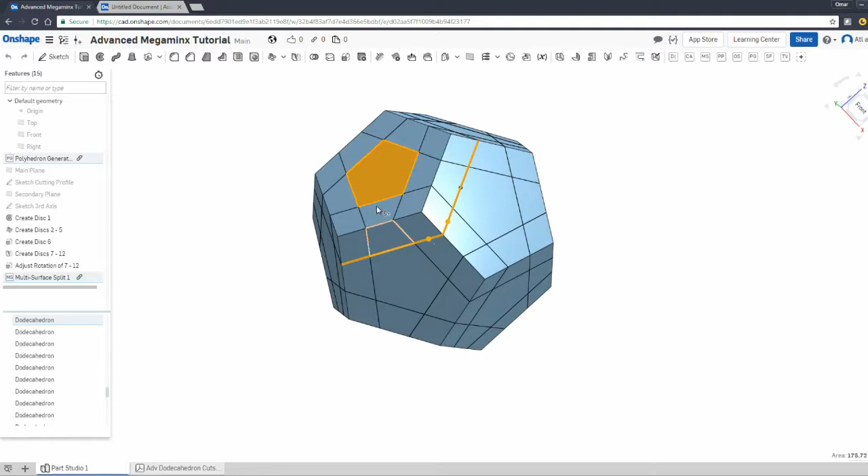I wanted to make this last video because there's another type of cut we did not talk about. I don't know what it's really called, but something like a corner cut, instead of cutting under the surface. When we create a cutting surface, the brim of the surface is parallel to the face, and that's not necessarily the case here. You would do that with a Starminx or other puzzles.

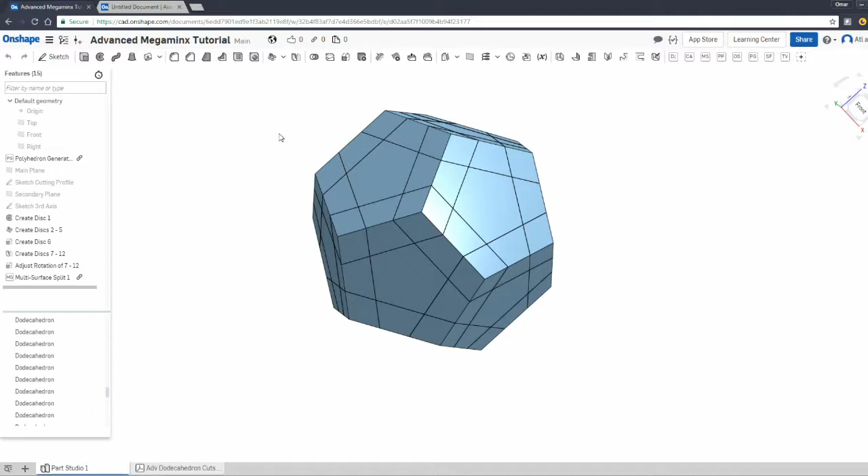I only know of a Starminx personally, and it produces a different type of puzzle. On the outside it looks just like a Starminx, but it turns differently. I guess it's called a corner turning Starminx or super Starminx, or maybe master Starminx or something like this.

In order to show you what I'm talking about, I modeled it here really quick in a basic assembly. Basically the corner rotates and it drags the edges along with it, instead of just a standard Starminx.

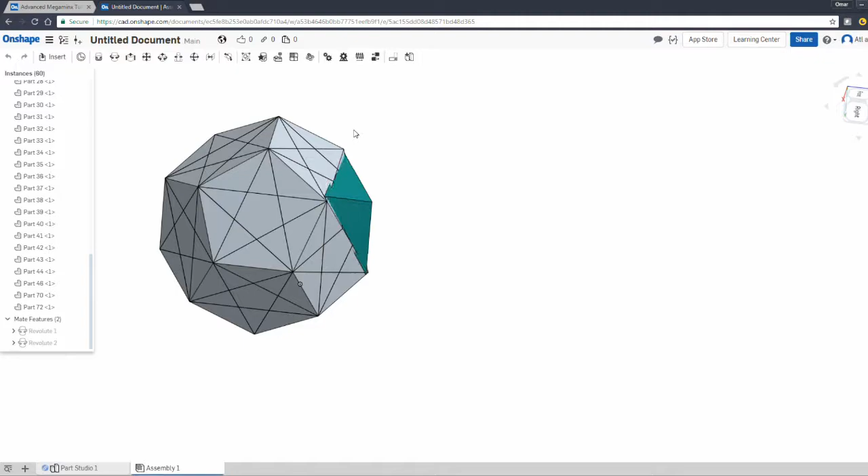If you look at your traditional Starminx, you'll find that these faces are what turns, along these lines here. This one has a slice that is like a shallow slice, barely just going under the vertex, and it gives you this rotating effect. I don't know what category it goes under, it's just a different type of cut that I've seen.

So let me show you. Basically, I did this by slicing off this face right here off of my dodecahedron, and I created this circular cavity that allows the corner to spin, and it drags the edges along with it.

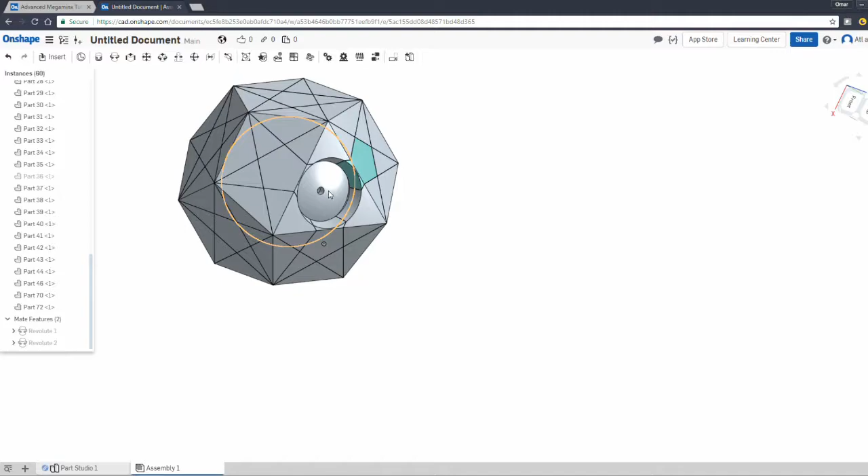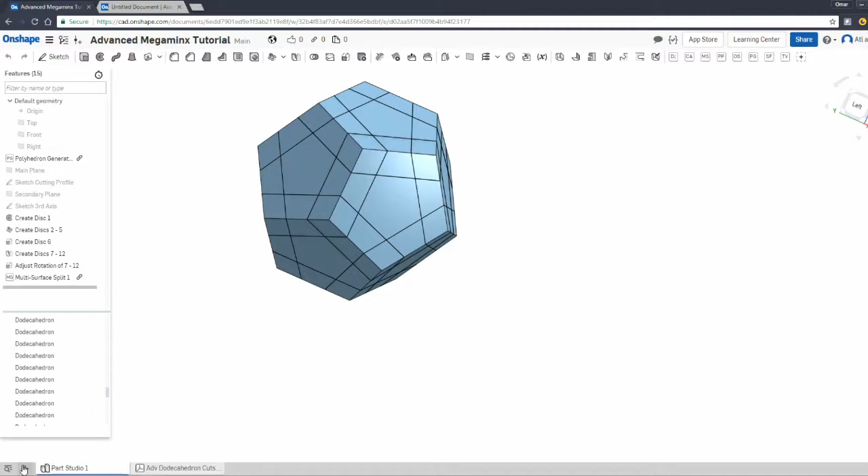Now personally, I've never 3D printed this part, I've never ordered it to be printed. I just reverse engineered some models and kind of figured out how it works, but I've never actually applied it in real life - my only experience is theoretical. But I just wanted to talk about it really quick to get you familiar with it. If you're curious how I made this cut, I'll show you really quick. I don't want to spend too much time on it, but I think it's worth talking about.

I'm going to use these tools that NKCube recommended in his series, the ones I referenced in part 1 of this series. Basically, I'm going to use a polyhedron generator in the origin and use a dodecahedron. I usually like these to be small, but the size is irrelevant in this case, so I'm going to do OK.

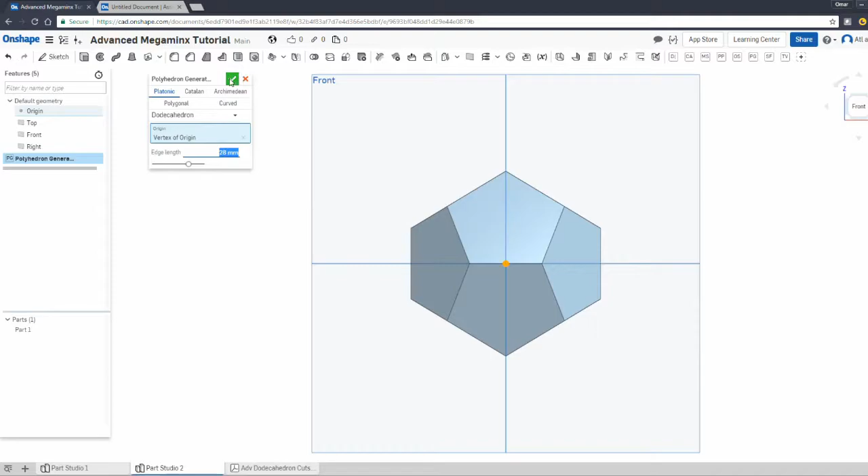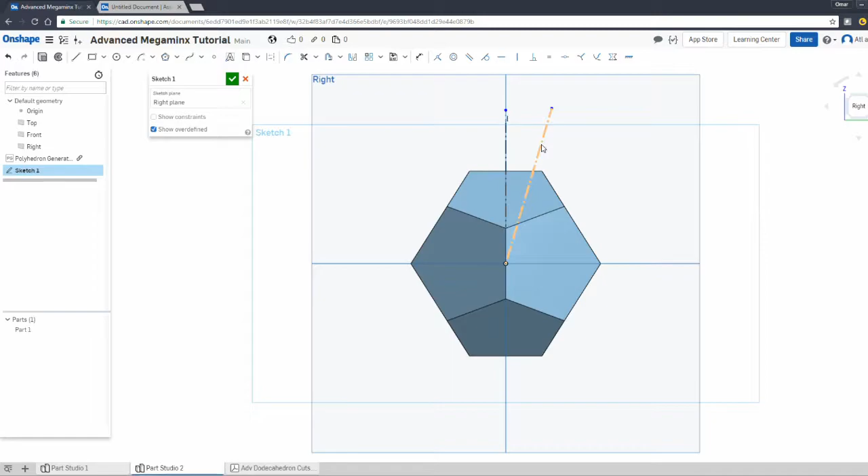Let's make a sketch on the right plane, and let's do a few construction lines here. I'm going to do one this way, and let's make one that's straight up vertical, and that's it I guess. And let's choose this vertex.

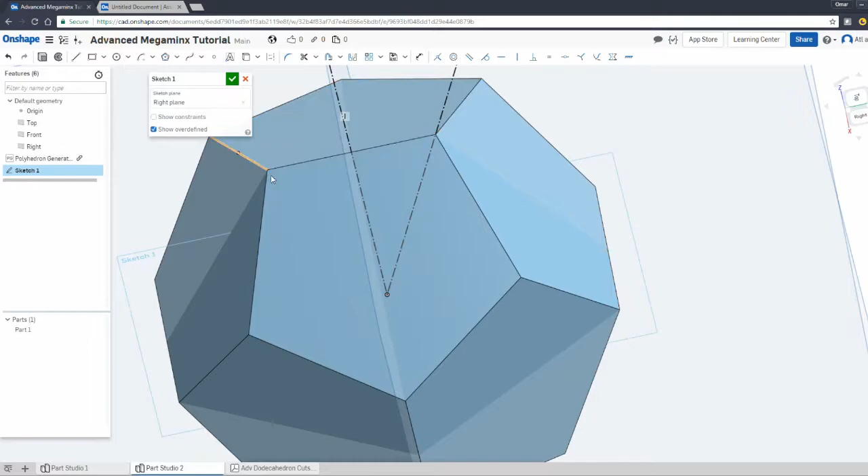So this is actually important. We're looking at this edge over here, the one that goes along this line. I want the construction line to go through this vertex here, so I'm going to make these two coincident, and I need a cutting line that goes into this vertex, into the opposite vertex basically. I hope this is clear. So we basically pay attention to this edge.

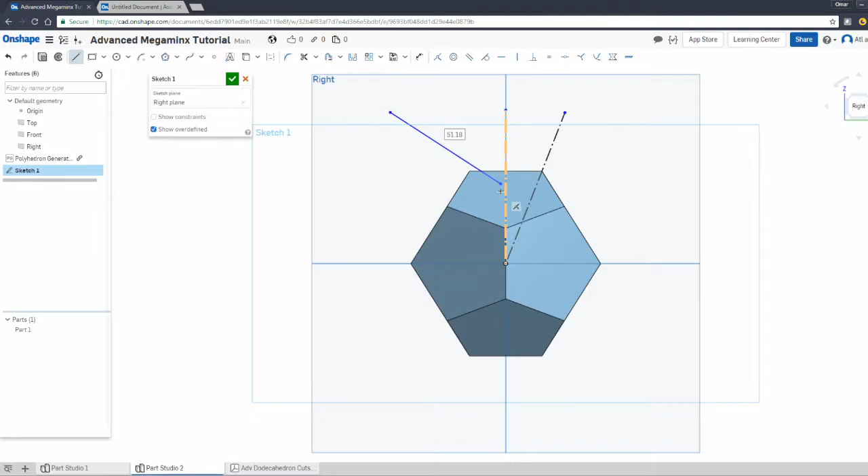I need my cutting line to go through this vertex over here. So to do that, let's just make a line quickly that goes this way, and you want it to stop near the vertical axis. Okay, so really quick, let's choose the vertex and the line and make sure they're coincident.

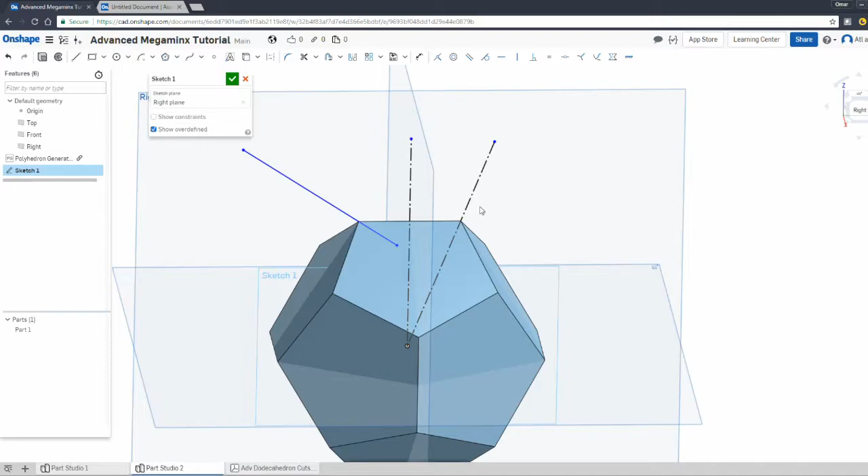Now one thing very important, we're going to revolve this cutting line around this axis. So you want to make sure these two are orthogonal to one another, or perpendicular, same thing. If you don't make them perpendicular, you're going to end up with a conical cut and you're going to have a curvy shape. So make sure you add this perpendicular constraint.

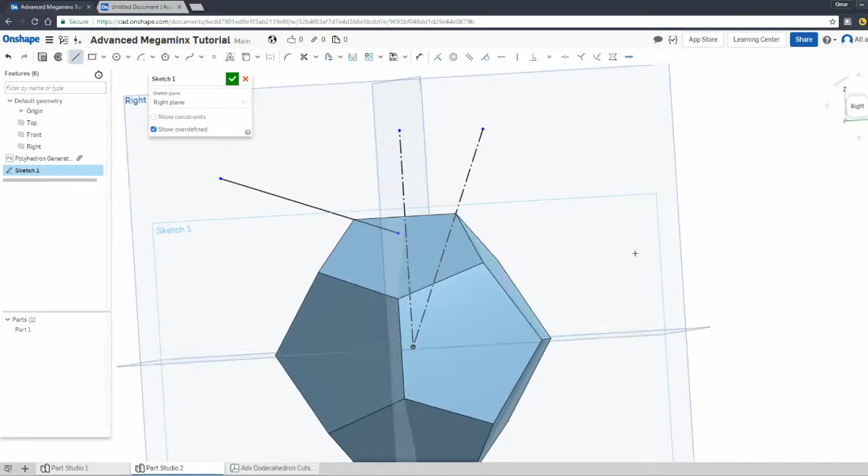Next, you want this line to kind of bend downwards. I always think of this - it reminds me of, if you're familiar with physics, Snell's law, how a light beam refracts downwards when it enters a body. So this comes in and bends, and this bend exists in pretty much any cut that you're going to make.

The reason why it's important is it gives you the body or thickness of your part. Otherwise you're gonna end up with a very pointy or sharp edge on your puzzle, and you won't have a good mechanism in place.

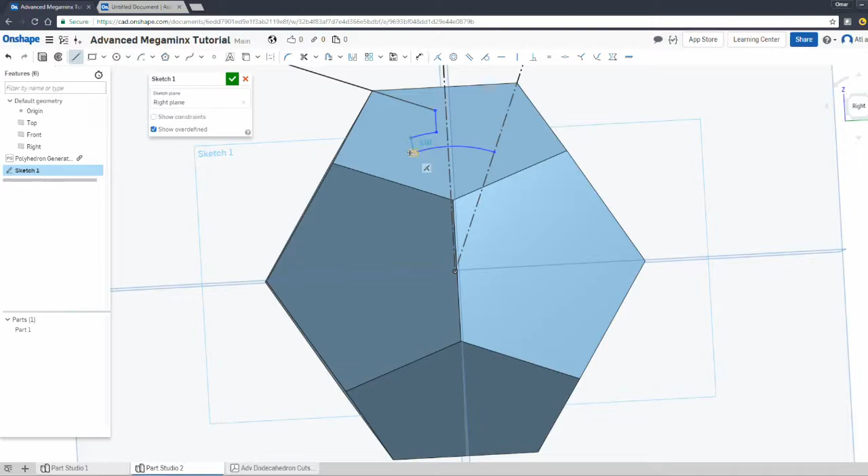So I'm gonna add another center point arc that goes into this edge over here. Don't worry, I'll make another video where I go in depth into this stuff. But even if I don't, this is a standard mechanism, exactly how we made the Megaminx, if you remember.

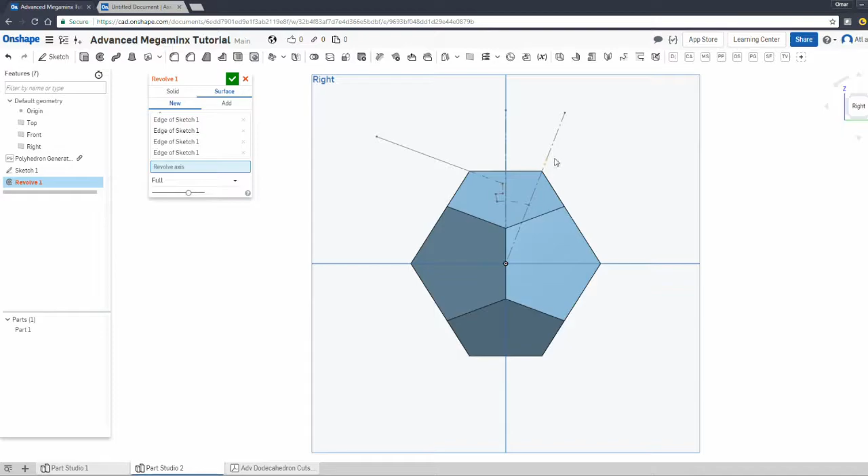So let me make a revolve here of a surface, and let's choose the different parts and make sure we revolve them around this part over here, and do OK. Let me hide the part, and what you get is a standard flat cutting disc with a standard mechanism.

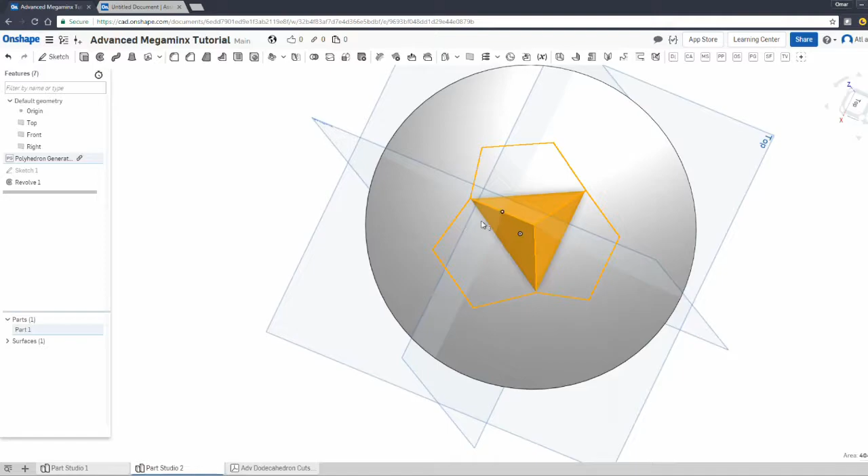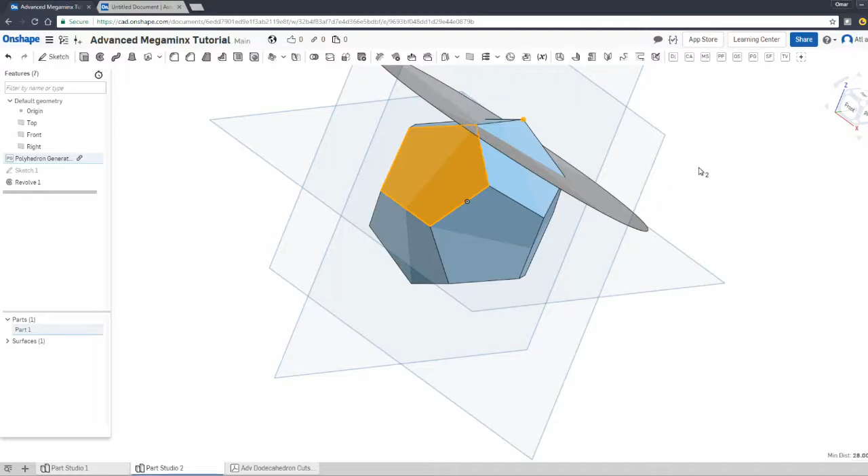But what's important to pay attention to is that it's slicing off this pyramid looking shape. The cut is not under a face of the dodecahedron. Typically the disc is flat under it, but in this case it's not - it's under one of the vertices, as opposed to being under one of the centers of the dodecahedron.

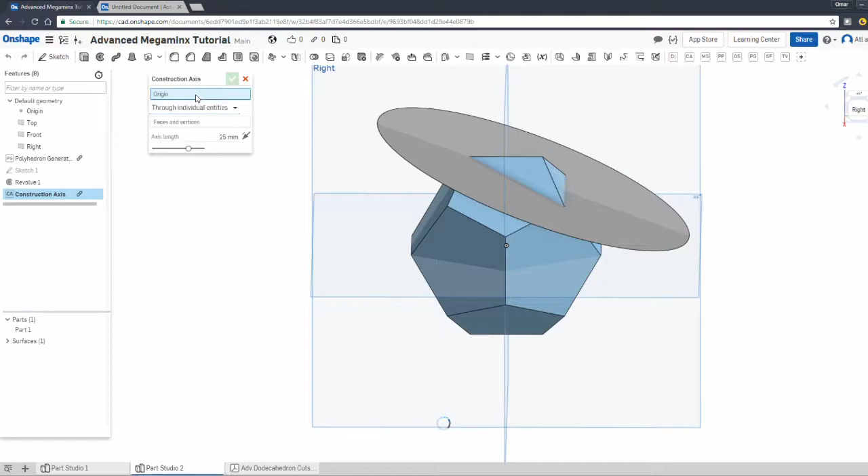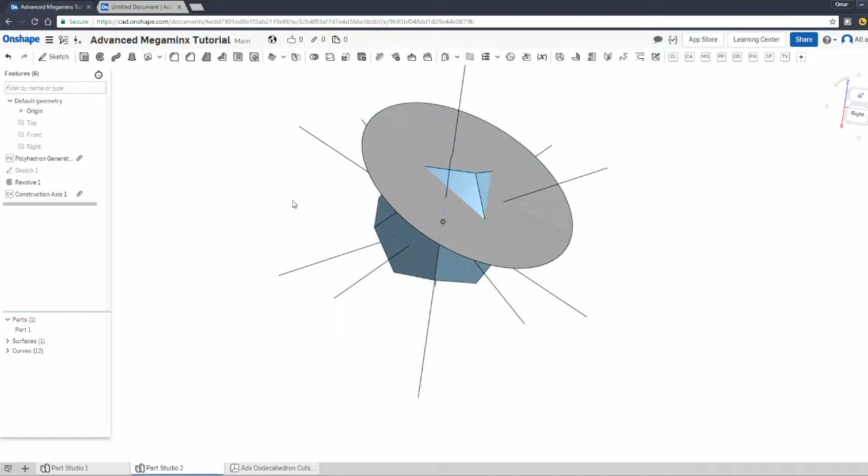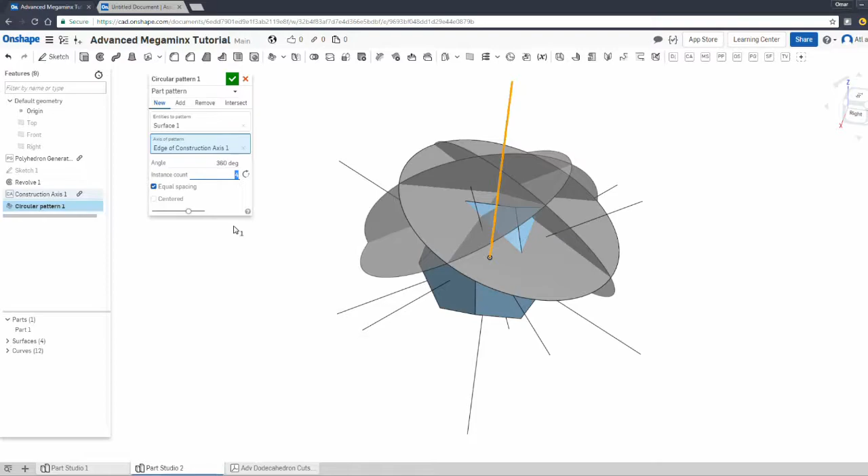So now we have all these construction axes, and let me hide the faces. I'm not gonna pattern the whole thing, I don't think my machine will handle it. Let's pattern the disk around one of these faces, and we want to do it 3 times, or 5? Yeah, 5 times. Let's do OK.

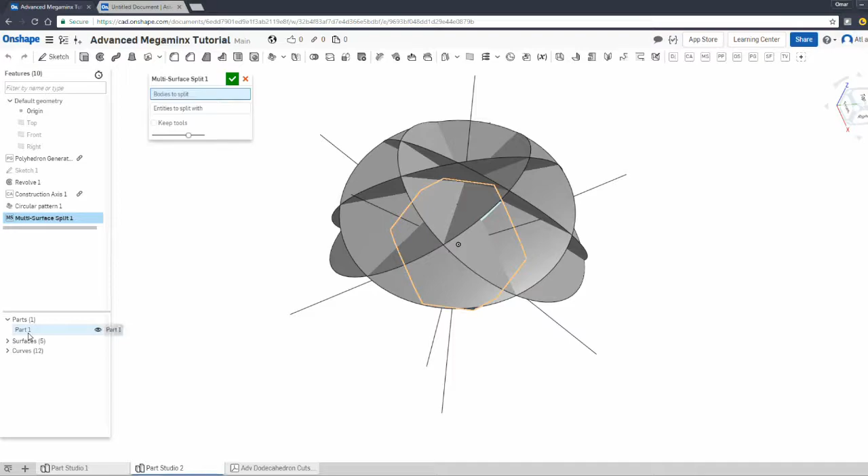Let me make sure if it's 3 or 5, I can't remember. But let's do a multi-split. For the bodies, let's choose the dodecahedron, and for the surfaces, let me choose those 5 surfaces. Let's see if this will give me a valid cut. And it did indeed. Do OK.

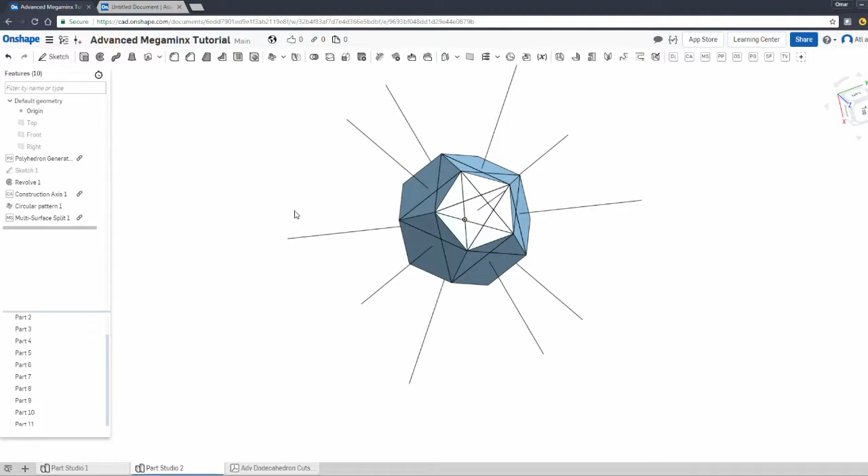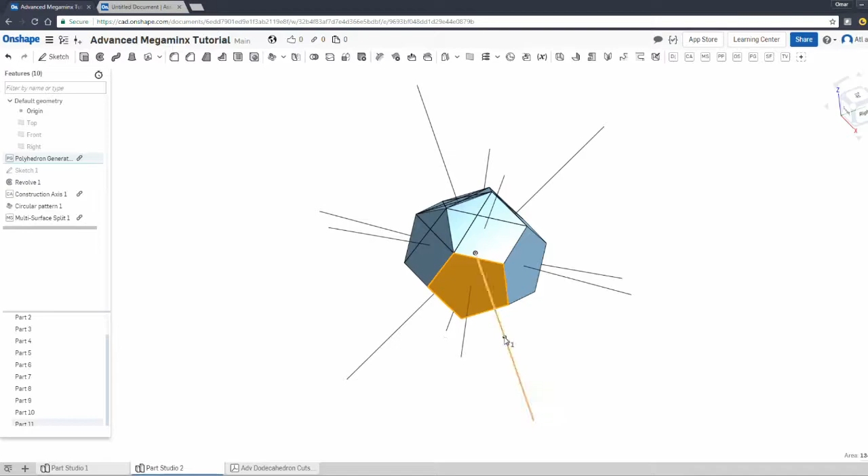You'll see it gave me what looks like a Starminx, but it's actually a corner turning Starminx, if that makes sense, because this piece is not cut all the way. Let me hide this body. If I hide these parts, you're gonna see the correct mechanism. It's almost there.

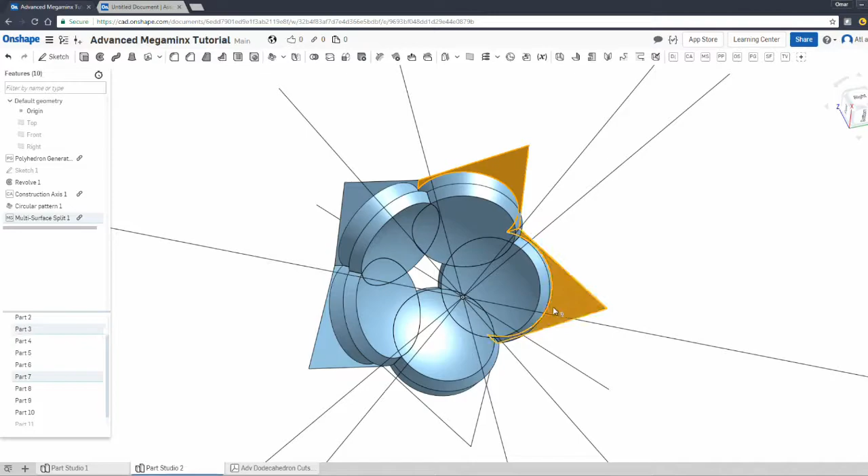Basically, what you're seeing here is the corner, but it's not fully broken down, or some of it is actually. Let's hide these. So we have the edges here, and I don't have any corners, I guess.

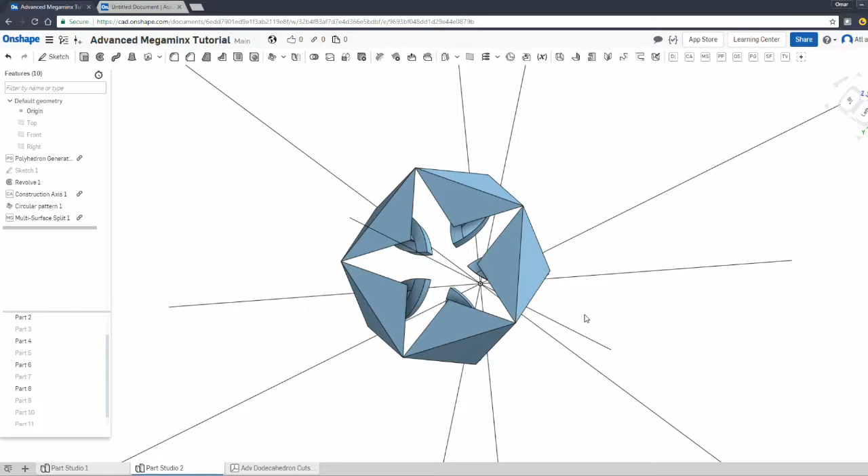Let's see if I can show you some corners. By the way, these are not complete, I'm just saying it gives you the outline of how the parts will look like. Again, I'm not an expert in this part, but I did play around designing this puzzle, with an existing design a while ago, and basically just got familiar with how the cut is done.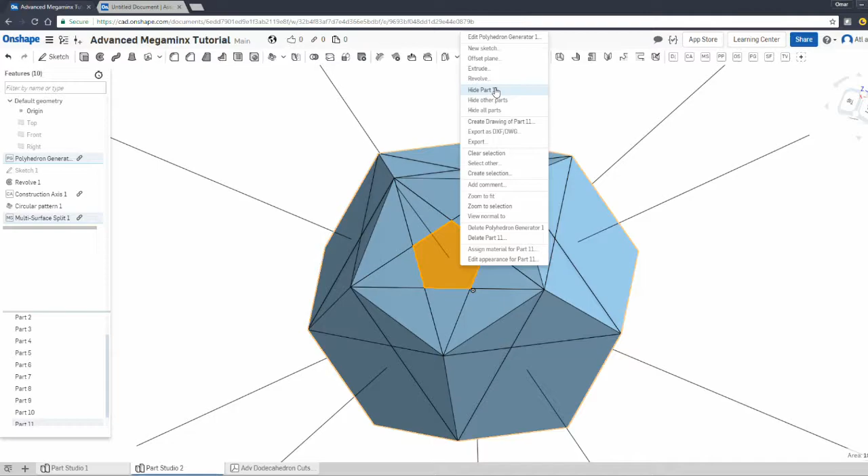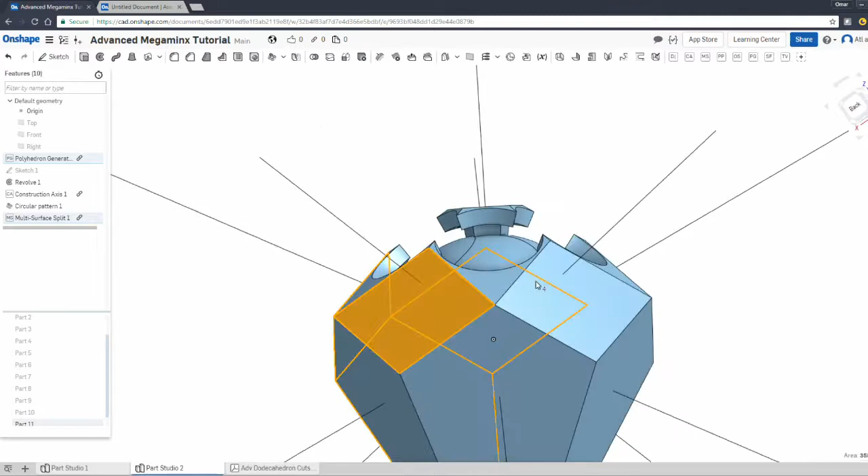Let me hide other parts and see. Okay, this looks funny, but okay - basically, this is what's going to become a center, and you have to slice it off with a sphere to free it from the body. And what you'll end up with is all these faces here are sliced, and you'll end up with centers instead, and so on.

So don't worry too much about this. I just want you to be familiar with how you can take your slicing discs and rotate them around, or basically slice under a vertex instead of slicing under a center of a face, to give you these corner turning puzzles.

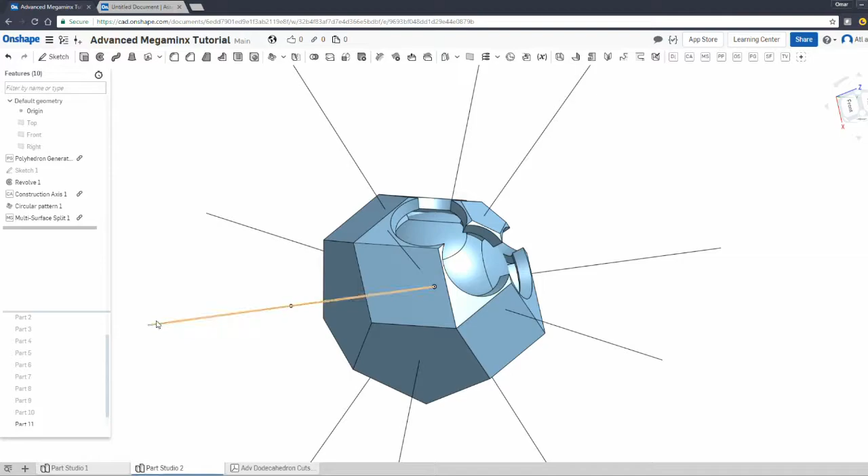So relatively speaking, this is like an advanced kind of concept. It's not really hard at all, but I wouldn't get into this before mastering the other more conventional puzzles, and then this will just be a straightforward puzzle to design.

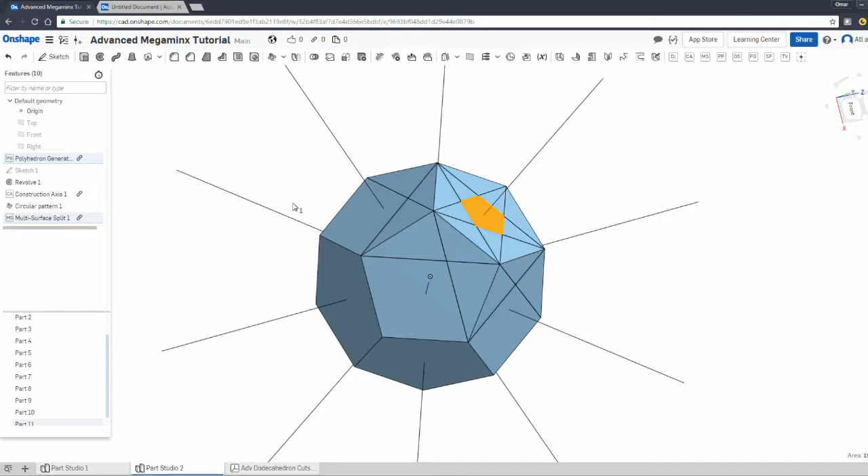So okay, I'm gonna stop the video here. I hope this particular part made sense, and I hope it kind of brought up to your attention some of the variety of other puzzles that are out there, and how they're built. We'll talk about all these parts in subsequent series in detail.